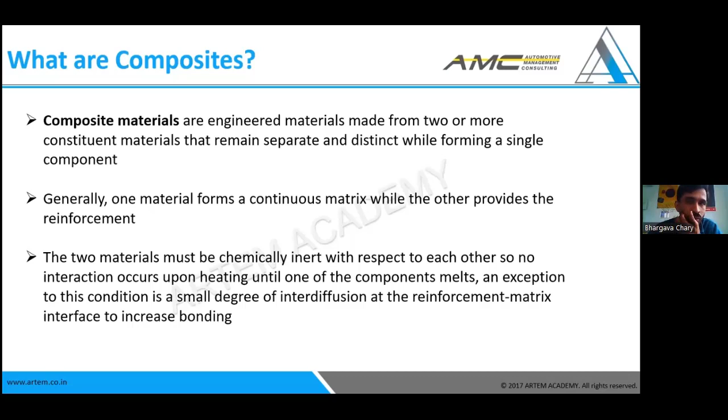So the major thing which we have to consider when we are mixing it is that the material should be chemically inert, because during the composite manufacturing process, like when we keep it in the oven, one material melts and flows into the other material. All these things should not be happening. So it should be chemically inert, but they have to be adhesive and dimensionally stabilized to each other.

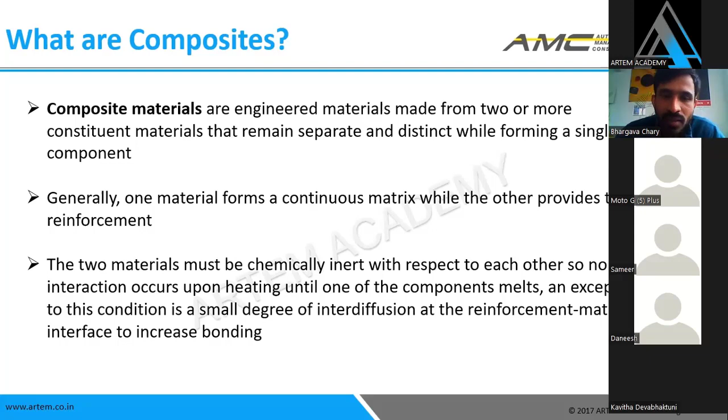So coming to the fundamental definition, it's a combination of two or three different materials. By mixing them, it forms a material with superior mechanical properties. So this is generally about the composites.

So where do we use the composites? Nowadays they have been used in boat hulls, which you can see in the figures in further charts, and in the aerospace industries, where lightweight is a major criteria which has to be considered, because the fundamental reason for the use of the composites is the structural and also the lightweighting potential. For example, carbon fibers are around 8 times lighter than aluminium with the equivalent strength. So that's one of the reasons, with the equivalent mechanical properties.

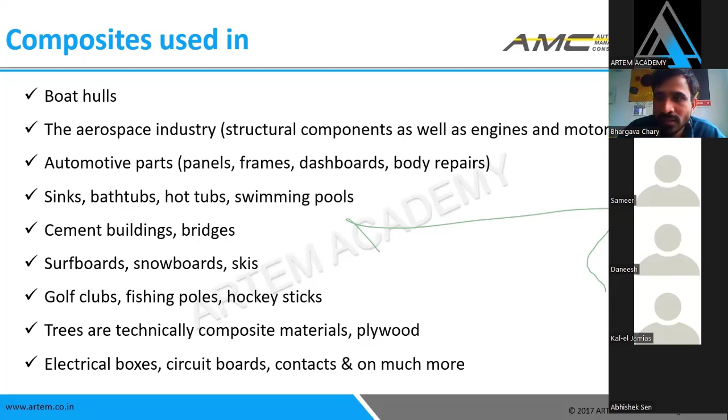So you will have opportunities in all the market segments you'll be involved in in the future, as a mechanical engineer, a civil engineer, or regardless of the engineering field. If you know the design, simulation, and production methodologies, then you are eligible in all market segments. It's completely widened. So these are the applications. Coming to the applications.

This pultrusion process gives an intelligent use of the fibers, so that it has very high strength and stiffness, and also an ultralight frame when we make composite frames for bicycles or motorcycles. We are also making some motorcycle frames for two-wheelers in India with composite materials.

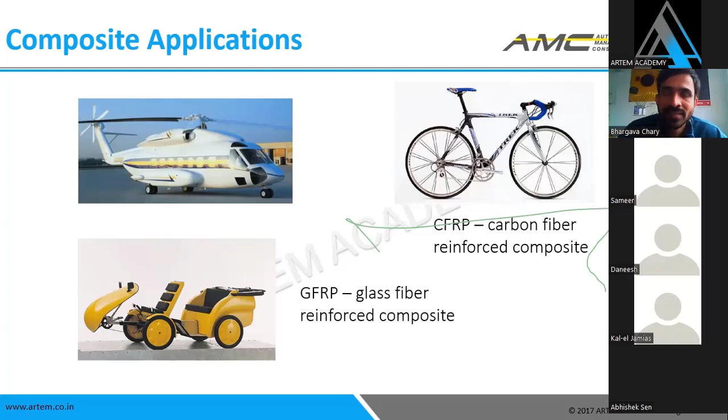It's completely light, and even now 4 to 5 people can sit on a motorcycle instead of 2 or 3. So it's completely safe, and it's completely worth the price. Coming to engineering, as I've told you, it's used in aerospace, automobile, and also pressure vessels and pipes.

In aerospace, for example, we have done a couple of projects for the aviation segment where we used natural-based materials as the reinforcement. We'll be looking into it further: what reinforcement is, what materials are used for the reinforcement, what matrix materials are used, and how the combination should work.

Coming to pressure vessels, if you see the cylinders in the house, they're too heavy to lift up. They're too heavy and not safe. As of now they're safe, but for further advancements, right now we are using pressure cylinders like LPG or gas cylinders made with steel, which are too heavy.

If we keep the same gas cylinder in the automobile segment for hydrogen gas, it's too heavy, so the range will be decreased. So there are advancements in pressure vessels for automotive and aviation segments that run on hydrogen gas storage. With hydrogen gas, a vehicle can travel around 350 miles in general, and hydrogen gas cylinders have been released by Toyota.

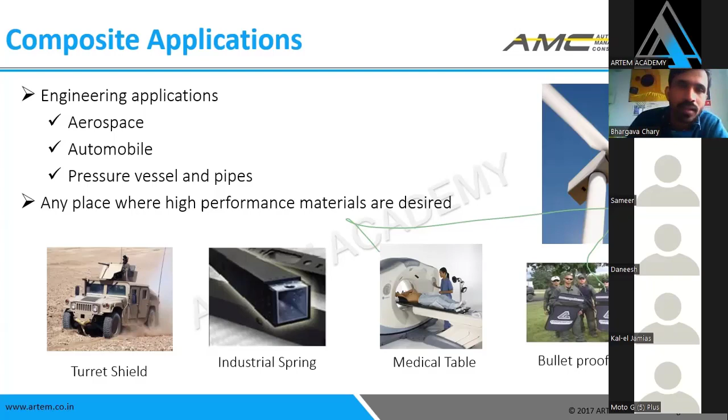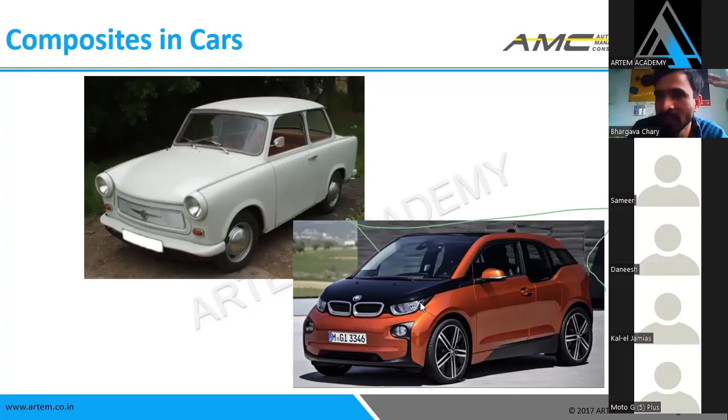In automotive, you can see the Trabant and its stability; it's too heavy. In later stages, this car's whole frame is made with composite materials using a process called VARTM, vacuum assisted resin transfer molding. We'll be looking into this process and its advancements in the coming slides.

Just to give you a feeling, these are the applications. For all of you looking for a good path, you could use this composites field, where you are eligible for almost all market segments and every field you would like to go into, and also for satellites, which have to be lighter, otherwise they will fall to the ground and won't fly enough.

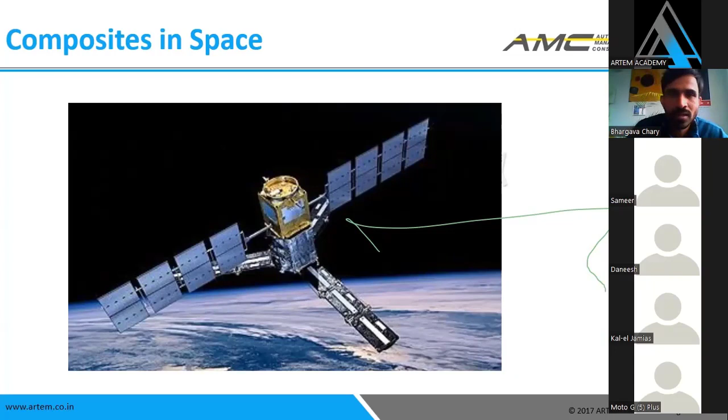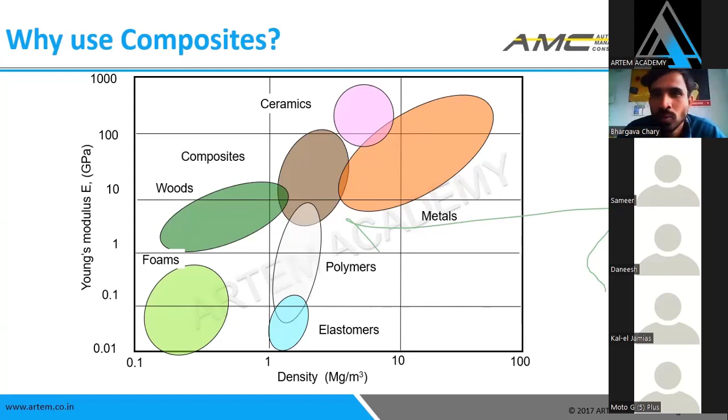We'll see the fiber orientations - fibers can be in the form of mats or rovings. We just spray the fibers, mix the resin, and apply it. This is called the hand layup process. It's discontinuous and randomly oriented.

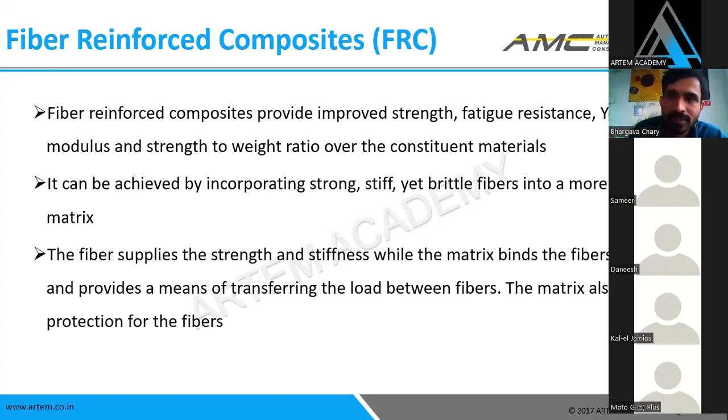So these are the fiber composite materials. And what are the characteristics? Let me show you the fibers, so then it will be easy for you. Yeah, these are the fibers, for example.

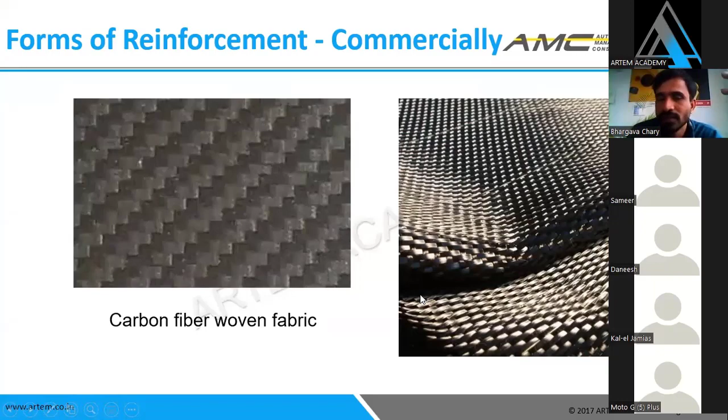These are the rovings. These are the fiber materials, which are one type, like the rovings. And the fibers can be in a form of mats and in a form of these sheets, woven, like what we see in the saris and all. So they use the fiber materials and stitch it, so this is in the form of a mat. So this is one type of fiber, and this is a carbon woven fabric. So these are some of the examples, I think now you could see.

So here, what are the factors that we have to consider while making a product? The length, the diameter, the orientation - that's what I have told you. Like it's randomly oriented, or continuously aligned, or woven, or non-woven. So how the fibers are aligned plays a crucial role. So the orientation, I have told you the importance of it, and the amount and properties.

So here we could use 60% fiber and 40% resin - 60% for more strength and 40% resin for the bonding between them. So which resin or material, as I've told you in the initial stage, like when we make a roti, we have some powder which is like the fiber, short fibers let us consider, and the water, which is a resin. So here the flour and the water have good compatibility. In place of water, if you mix some Dettol or some different liquid, then it won't mix properly. So the compatibility between the fiber and the resin should be tested and identified.

So these are the factors that we have to consider. One is the length - depending on the length, the orientation will be there, whether it's a short fiber or a long fiber. And the diameter - to give you an example, here you could see like one filament has from 10 micrometers to 150 mm. So it depends what we have to consider in terms of diameter. If it's more, then we need less material.

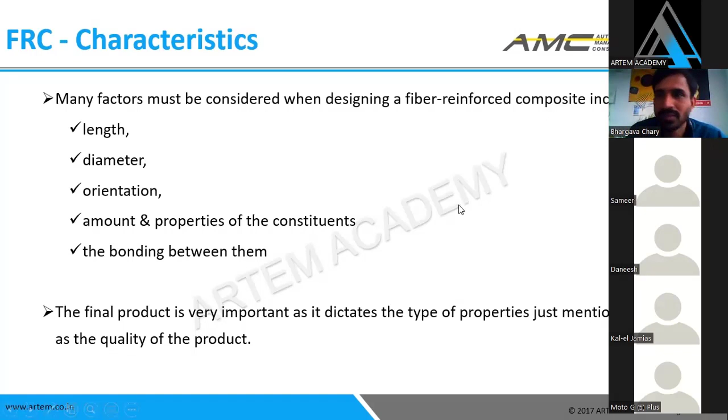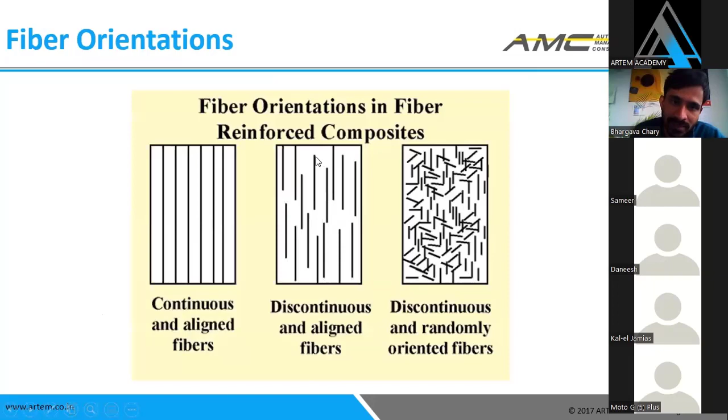Mainly, the fiber dimensions are characterized by the aspect ratio. This aspect ratio is nothing but length by diameter. So what's the length? As you have seen here, this is the length, and the diameter is how thick it is. Based on the L by D aspect ratio, the fiber dimensions will be characterized. The strength is higher if the aspect ratio is large. So what does it mean? If the aspect ratio is large, or infinity for a continuous fiber, the strength will be much higher compared to normal short fibers.

So it's directly proportional - the aspect ratio is directly proportional to the strength. If we need more strength, we have to use long fibers, more L by D. We have to cut better, meaning we have to cut long fibers. If we're aiming for this strength, we have to increase the size L by D so that we'll have good strength, good aspect ratio.

The strength always depends on the L by D and other factors also, but most of the strength depends on the aspect ratio. So here in general the diameters will be 10 mm, and in terms of rovings it's 10 micrometers.

So there's some of the products like 24K, 48K. This 24K means there are around 24,000 small fibers, strings - each and every string. To 48K, 48,000 - in this you could imagine how small there will be.

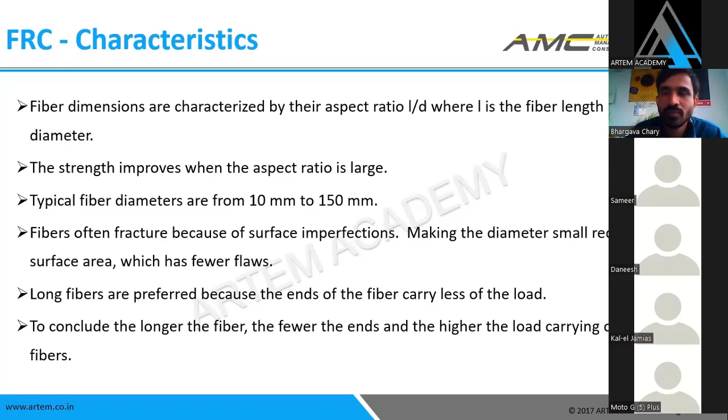So long fibers are preferred because they can easily carry the loads from one point to the other without any disturbances or breakages. So the long fibers give more strength than the short fibers. To conclude, the long fibers carry more load carrying capacity than the short fibers or the randomly oriented fibers. So here you could see the strength - these are some of the tests.

So here there are different types of fibers that we use. For example, the glass fibers - as you're all familiar, they take from the rock, and they add some silica material in different proportions.

They make a glass fiber and the carbon fiber also, and there is also some natural based, like the basalt fibers and the flax or the hemp, and rayon. So there are lots of natural based fibers where we can take it from nature, from the environment, or from plants or trees, so that the product we produce will be recycled easily.

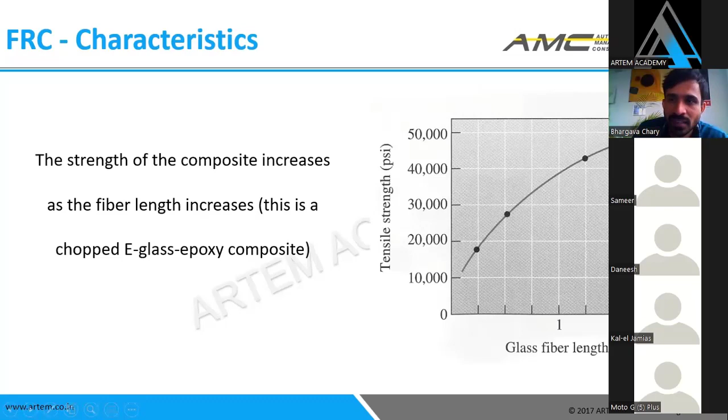When the fiber length increases, the strength increases. These are some of the tests that we have done, and these are the results, the test.

And the orientation, as we have seen - when the fibers are oriented, for example this is one of the orientations. When the fibers are aligned in this orientation, if you see my camera, when the fibers are aligned in this orientation, then if you pull, there is a loss of strength that these fibers can withstand.

So when we use it in a horizontal way, and then pull them - these two fibers are joining each other. If you pull in this direction, it too easily comes out - it has less strength. But when we keep this, and then pull in this direction, it can carry more loads. That's what we can see here.

Here the long fibers are oriented parallel to the applied load. So we have to use the fibers more intelligently, so that fibers are placed always parallel to the loads. So here this is an orientation.

So if we make a 45 degree plate, all the fibers which are at 45 degrees, 60 degrees - so this is an orientation. So when we are making a mechanical test, when we orient the fibers parallel to the loads, it has more strength compared to the horizontal loads.

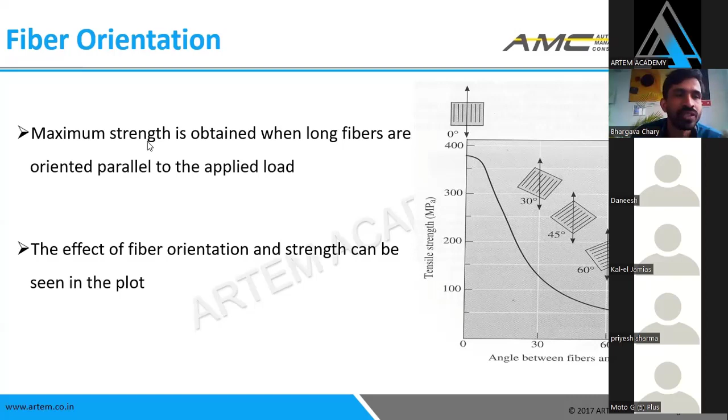So here, to achieve the thickness, we use composite sheets, fiber sheets, which can be called prepregs, for example. When we use these prepregs, it depends. We can tailor the composite materials, one in this direction and the other one in this direction, so it can withstand all the loads which are acting. So we can achieve the material properties by the orientation of the fiber materials.

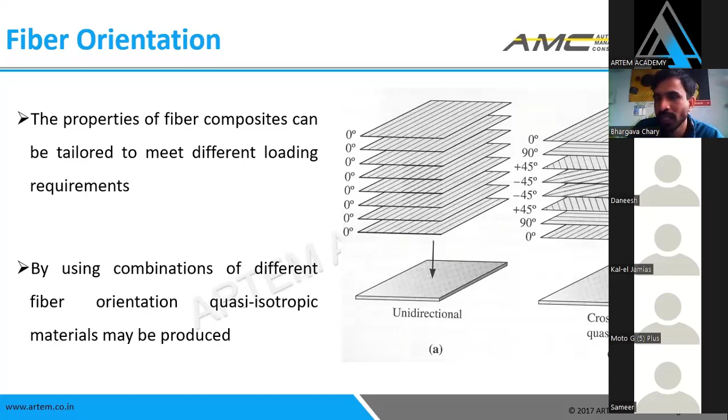Yeah, that's what it said. So you can see there are different orientations over here. This is a cross-plied quasi-isotropic. This is a unidirectional composite material. And we can also make a 3D structure. So these are all the filaments over here.

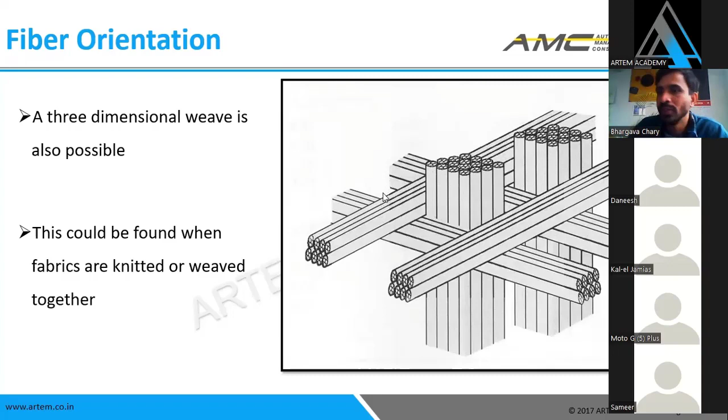So we can place the fibers in all the different directions we need, and a 3D structure can be formed with the composite materials, knitted or woven, by using weaving technology or knitting technology, or by using mats which are already made prepregs.

So the fiber properties, basically, are the specific strength. Specific strength is nothing but the tensile strength divided by the density of the material. So here the fibers are stiff, strong, and lightweight. Basically, we could achieve more than 80% weight reduction compared to steel or aluminum. So when you have 10 kilos, it can come down to 800 or 700 grams by using intelligent composite material processes.

There are different composite manufacturing processes that we'll be seeing in a later stage, how composite materials are manufactured. So this is only the theory, the basic understanding of the fiber orientation, what properties change and how we can align the properties. In the later stage of this webinar we'll go into the composite manufacturing process, where we'll see the real manufacturing of composites.

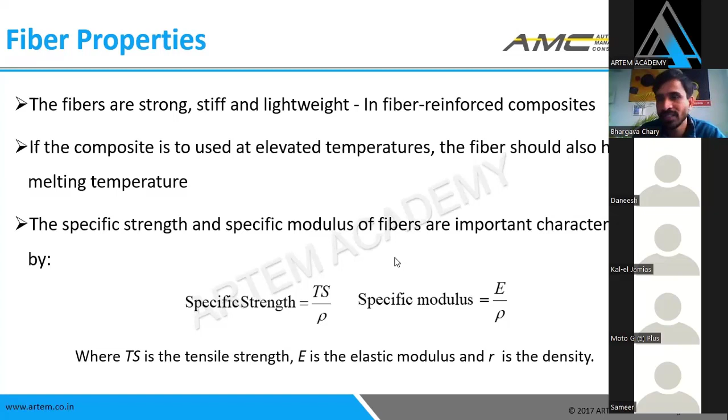So yeah, these are the specific strengths we always look into by testing with the tensile test, the bending test, or the Charpy test, various tests. We'll always be looking into the specific strength and specific modulus. As I've told you, there are different fibers, like glass fibers, carbon fibers, aramid, basalt, flax, hemp, and various other fibers that we could use.

So these are the commonly used ones, and matrices of polyester, for example a thermoset polyester, unsaturated polyester. There are different matrices, thermosets and thermoplastics, depending on the process we'll be using. Just to give you short information regarding the manufacturing processes, the thermoset manufacturing process and the thermoplastic manufacturing process.

Thermoset is like an omelette, what we cook in regular life. When we pour the liquid from inside the shell and heat it, then it becomes strong, it becomes hard. This is thermoset. And thermoplastic is like cheese. When you keep it on the stove, it melts.

So here, with an increase in temperature, thermosets get stronger and harder. Compared to that, when we increase the temperature of a thermoplastic, it becomes soft and turns into a liquid form. And vice versa, when we decrease the temperature, the thermosets will not be in a hard form, and thermoplastics can become hard.

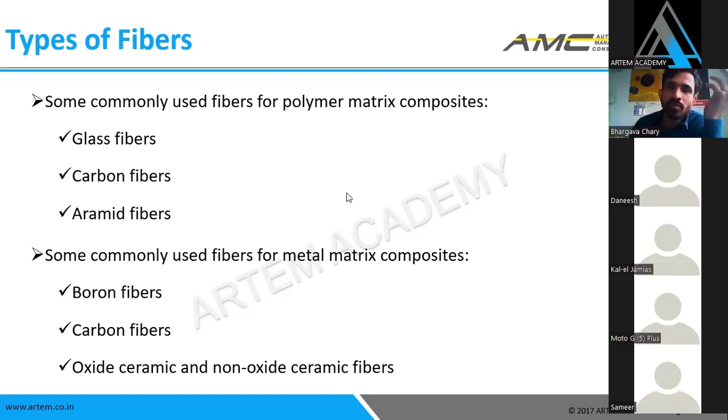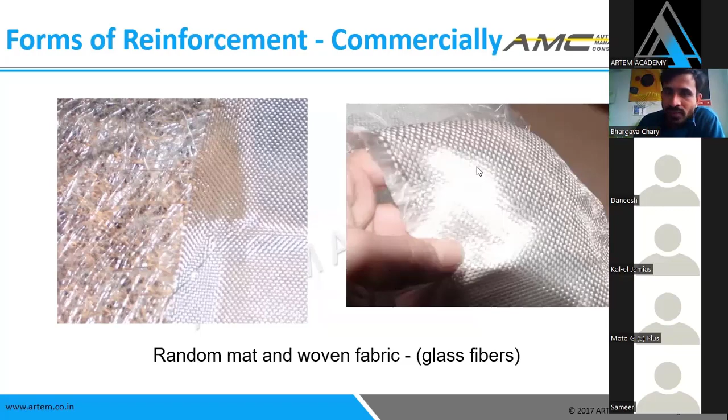is they'll be taking this mat or the woven fabric, and then they'll be placing it on a sheet or, for example, on a mold, and then they'll be applying the resin. Resin is like water, so they'll be applying the resin, and then they'll be keeping the other mat, applying the resin, keeping the other mat, applying resin.

But as we have seen, these orientations determine the property, because one can be oriented in this direction with the fibers and the other can be in this direction. So it depends on the thickness, what we need. The fibers are just piled up by keeping the resin in between, which acts as a binder. So this is a hand layup process here, you could see.

And coming to the spray, it comes in the reverse direction. They'll be keeping all the resin, and with the jet here, what you see, they'll be just spraying the whole fiber materials, the short fiber ones, which come with a greater velocity. They'll be spraying it so it sticks to the mold. So it's similar to glue. When we have glue on the ground, if we keep the hand, then it sticks.

So in the same way, the resin they'll be applying to the mold, and then they'll be using a spray gun. They'll be spraying each and every place. So this fiber will be settling over there. Then the final will be complete, and then they'll be removing it from the mold, and they'll be using it in the real circumstances.

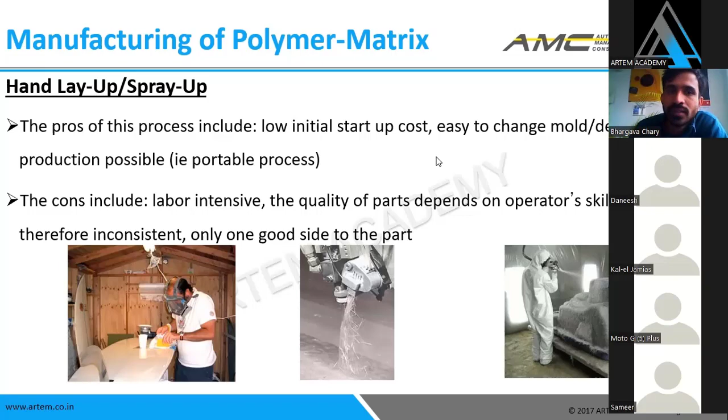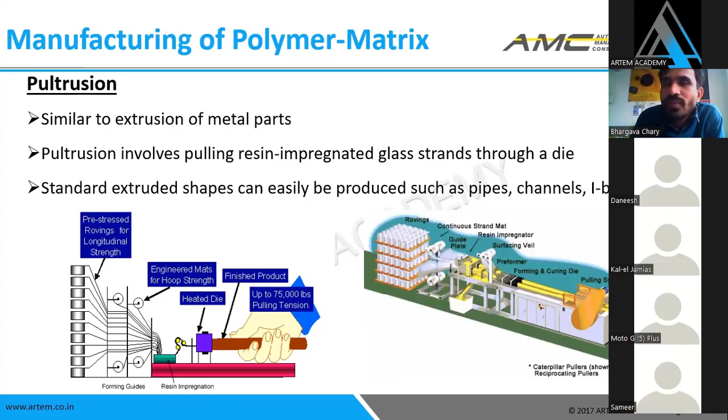So here, in a similar way, the resin-enriched fiber material will be placed into the resin bath, and then it will come out from the mold, such as pipes, I-shaped beams, and all these can be manufactured. All these fibers are continuously oriented, so these are very strong, stiff and ultra light. You can hold a big pipe with a single hand. So these are completely ultra light pipes, which can be produced with the pultrusion process.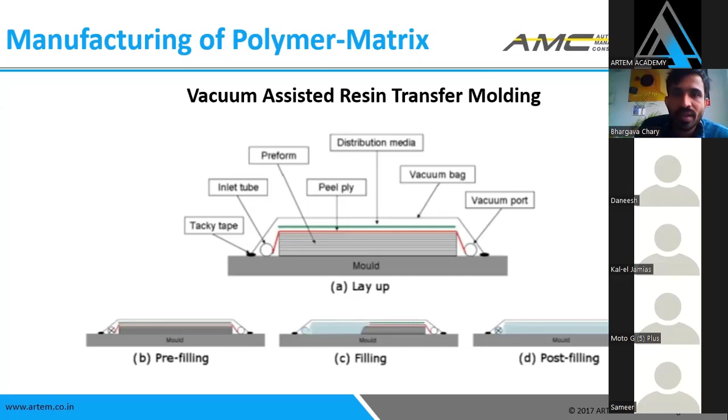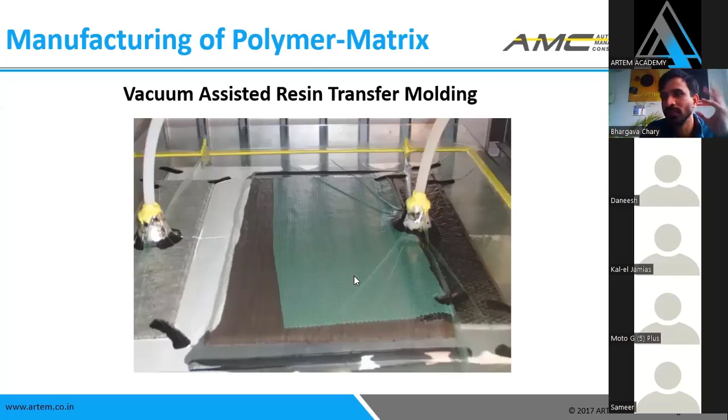Yeah, you could see this is an inlet, and then this is a vacuum. Because of the vacuum, the whole section is vacuumed, and then it sucks all the material. So here the resin is transferred completely over the mat, and then it becomes a stronger material, with a binder which is added. That's the matrix.

So coming to the conclusion, we need to have a high specific strength, which is nothing but the strength-to-weight ratio. Here we can have high tensile strength, bending strength, shear strength, with around 8 times less weight than steel, and 4 to 5 times less than aluminium. So we can have lightweight materials also. I'll just tell you the importance of lightweight. If our car is lighter, then we can travel more range in automotive. If the aeroplane is lighter, it consumes less fuel, it emits less emissions, and it can increase the range.

So in each and everything, lightweight plays a crucial role. Lightweight and also safe. Safe is nothing but strength. So we need to have lightweight and strength. Then we need to use composite materials.

Unlike aluminium, if you see aluminium, it corrodes. Because of the corrosion, the material properties always decrease when corrosion from the environment acts. These composite materials are corrosion resistant. We can add a coating on it. With or without a coating, they're corrosion resistant materials, and there are various composite manufacturing processes.

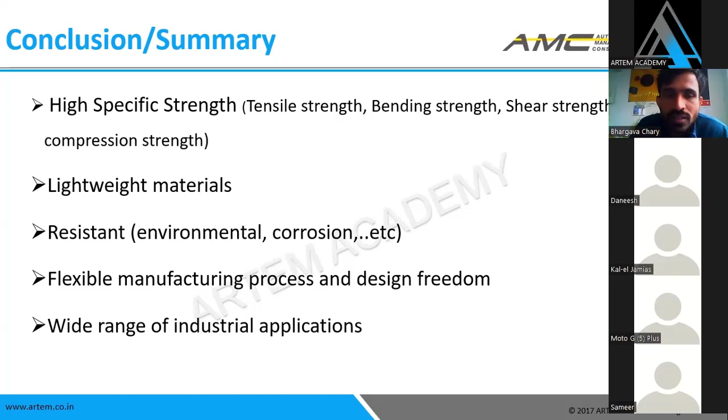Thank you, Bhargav. I would like to summarize what Bhargav said. He has given a good glance in the very limited time we have. He took us through different things, starting from what a composite is to manufacturing the product, that is, the output of the product, in a very good, efficient way.

He suggested that different composite materials have different patterns, and they'll be used everywhere according to their applications. Any product is used for two purposes: efficiency, that means strength, and manufacturing cost based on the materials. Composites can be of various materials, starting from metal, bio and glass, polymers and many other things.

He also discussed the orientation of the polymers in different directions, and how, based on the orientation, the product is effective and efficient with high strength. Based on the application, we choose the orientation. In the aero industry, you need a very light material with more efficiency, whereas household things can be made through a spray method or a hand method, which is good enough in terms of cost efficiency and strength.